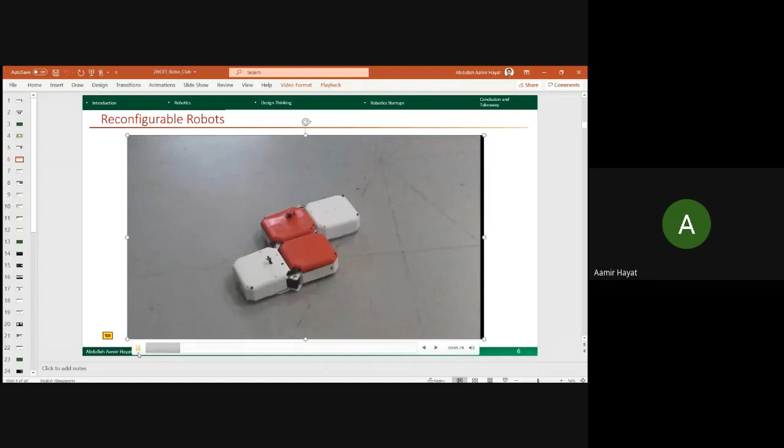So this robot is named H-Tetro. It's inspired from tiling - I hope most of you are familiar with the tiling toy we used to play with during our childhood, that can change its shape. This is inspired from that concept, and this robot is named H-Tetro, H for horizontal, and Tetro is basically from Tetris. It can change its shape into I, J, L, O, S, T, and Z configurations. At the same time, you can see the application of this.

This is a typical Roomba robot for floor cleaning, and they have sold million units worldwide. But this has a fixed morphology, and it cannot access these areas. So this is the experimental setup that we developed for proving the advantage of reconfigurability. There is a camera mounted on top, and this can access the narrow passages. This was the prototype we developed earlier, and now we are using it for a floor cleaning application. As you can see, this is the area coverage that we show. The advantage is, as it can change its shape, it can even do the fishbone trajectory to cover the area.

This is the team involved under Prof. Mohan, who is working on tiling robotics. This is a new branch of robotics that we are pitching to the community under the name of tiling, because mathematicians developed a lot of theorems and formulas for how to tile a given space so that the area coverage can be maximized. So the theory backup is taken from there, and we are adding to the aspects of research and development through this robot. This is one of the publications that I did.

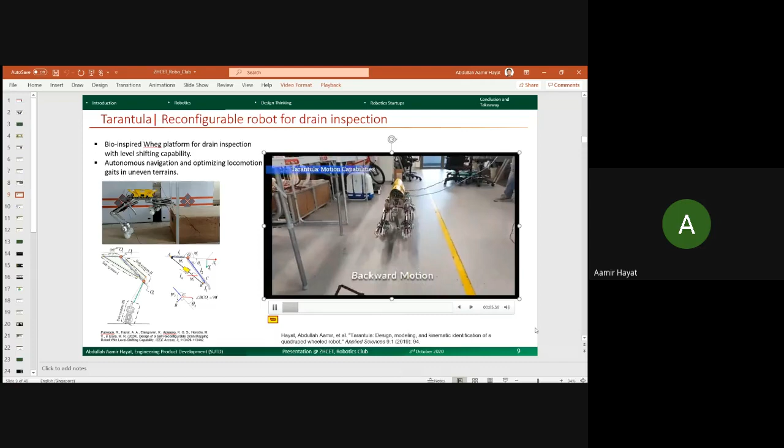I will play the video to give a feeling. This was my second project here, which I led a team on. We have very good design engineers, Dr. Karthik, his design intuition is very good, and we discussed through the starting phase of this, and we developed this test bed to test the level shifting capability of this.

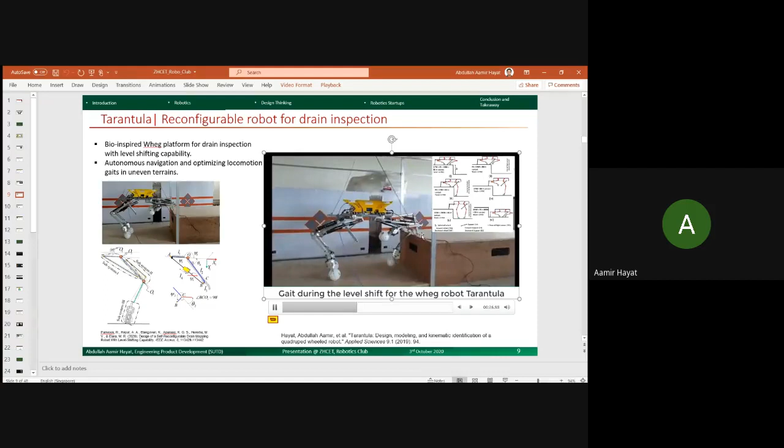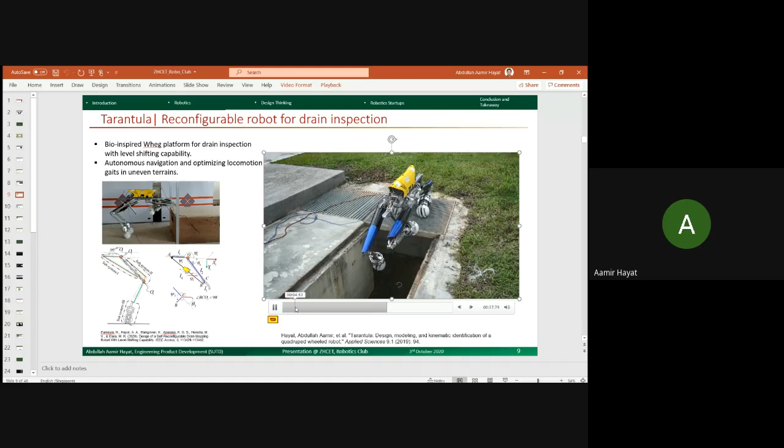And these are the gaits being taken by this drain inspection robot. These wheels are, again, a novel development from our lab. We also got a patent out of this, which I will show, what are the features of that wheel.

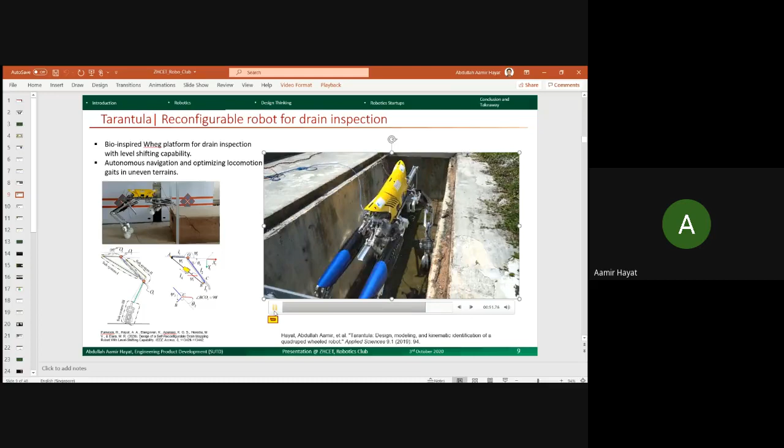So basically, in robotics, there is a portion of cake for everyone, be it mechanical, electrical, electronics, or architecture. Even before coming here, I thought, okay, what will architecture people do, but now they play a very important role because they are developing futuristic buildings which will have human-robot coexistence. So now they need to redefine the designing of a space, that is another field we do research on in our lab.

We have architecture graduates, like BArch, in our ZHCET. One fellow, his name is Matthew, he is pursuing his PhD in robotics. So I'm looking at the futuristic design of a building and interiors so that humans and bots can coexist easily, because whatever we have designed till now is human-centric, not robot-centric.

As I told you, the wheel is one of the novel developments from our lab, and it is labeled Ospheel, the acronym for omnidirectional spherical wheels. And omnidirectional, I hope, as the word itself suggests, is familiar to you, I hope all of you are familiar with omnidirectional and holonomic wheels.

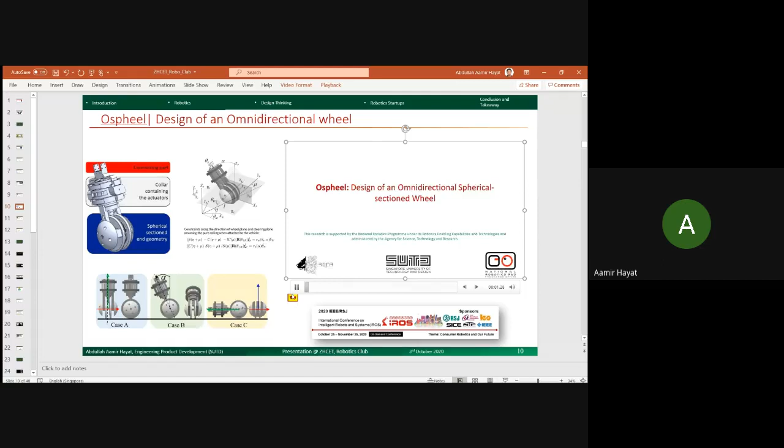So this is basically having two active rotations. Basically one like a simple wheel, and the other is orthogonal to it. One is like a wheel, like in a car or bicycle, that is one direction of rotation, and another is perpendicular to that. So just to ask, have you ever observed this kind of mechanism anywhere, in any of the movies or anywhere?

Any answer, in any movie have you observed this? Dark Knight. Yes, right.

So we got the inspiration from there, and then we spatially arranged this gear mechanism. The transmission is done in such a manner that it allows for two orthogonal rotations about it.

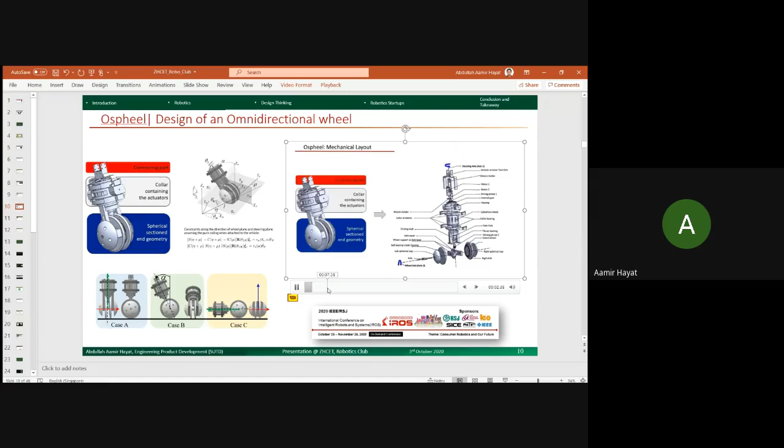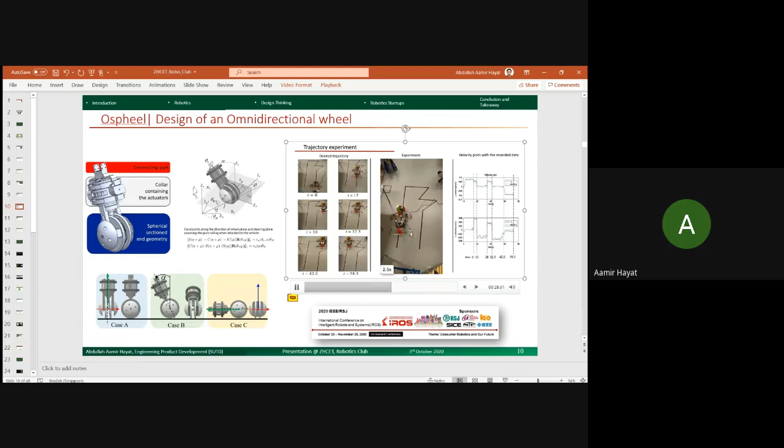Since this is modular, you can club it into four, as was visible in case of Tarantula. Now we tested its holonomic capability by mounting it using two of these wheels, and this is one of the nice videos that we took.

There are others, I think most of the robotics club people must be familiar with the Omni wheel and Mecanum wheel. We use it for holonomic locomotion, so that the bot can move from point A to point B without steering. It has the capability to move in any direction at any point of time.

So this is an add-on to that, because those wheels, specifically Omni wheels and Mecanum wheels, are meant for indoor environments. For outdoor use, there are passive rollers, and dust particles, hair, all those things get entangled inside the wheel, and that gets it jammed.

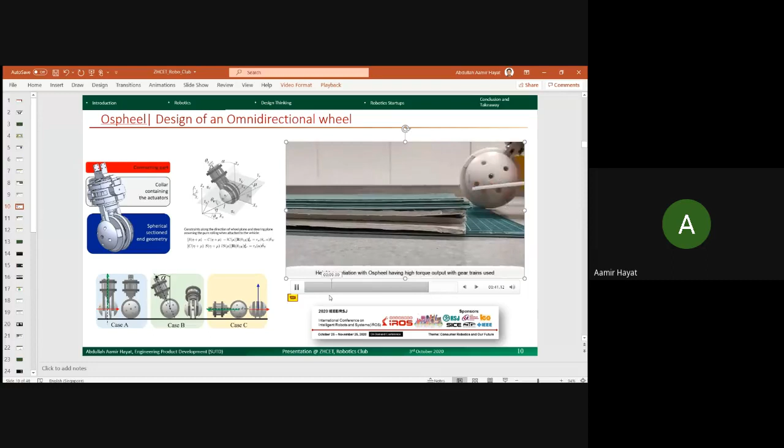So you can see the opening. So we have designed a cover for it, so it is completely sealed, so that the outer particles cannot get in. So this is one of the works.

The wheel is patented, and then we put our work into one of the esteemed conferences in robotics, that is IROS. It is this year, held in, I think, Las Vegas, USA, but due to this COVID situation travel is restricted, and they have even waived off the fees, because generally they charge a good amount. I think for the paper, after acceptance, the charge is around 1,200 USD or something.

So there is again one takeaway for all the participants here, that you all must join this conference, because this is for the first time the conference is free, and the whole robotics community will be there, ranging from people in mechanism, autonomy, control, biomechanics. So all sorts of exposure you will get there. There are very good professors who always visit these conferences, and the impact of this conference is very high.

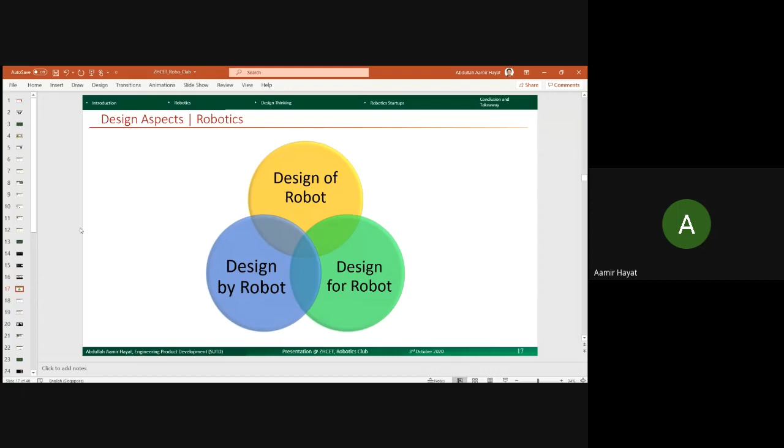So these are the three aspects we look at in our lab design. Apart from design of robot that everyone does, we also do design by robot and design for robot. As time is limited, I will just skip this, maybe some other time I will talk on this aspect.

Always keep in mind, whenever you are designing, always design a thing by considering it in the next larger context, like a chair in a room, in a house, in an environment, an environment in a city plan. So everything should be coherent. It should not look like an odd man out. If you keep anything disorganized in your room, it will be odd and won't serve its purpose. So always think in a larger context of what it is meant for.

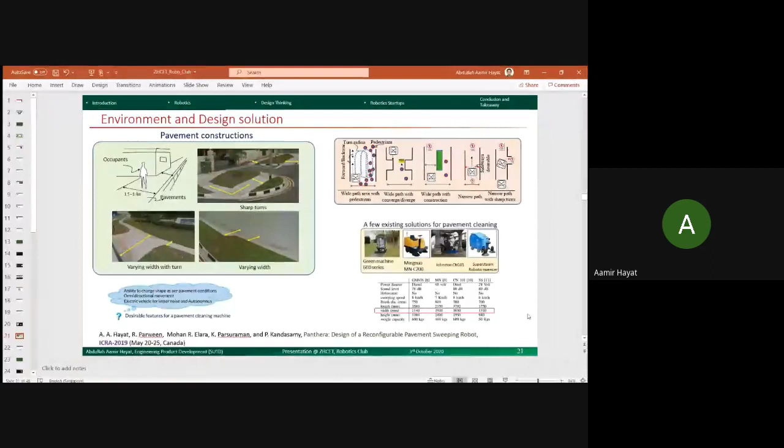So our objective was to come up with a design that fulfills this requirement of adjusting itself in a multiple width pavement scenario, and it should not obstruct pedestrian density, because in peak hours the number of pedestrians increases, and the machine also needs to give way to pedestrians, because pavements are made for pedestrians, not for machines. So this cleaning machine was developed from our lab, and it can reconfigure. This is the animation proof of concept.

One thing I observed is that even people involving architecture background are very good at software like Inventor and Maya, the animation software. So they help us in visualizing the concepts.

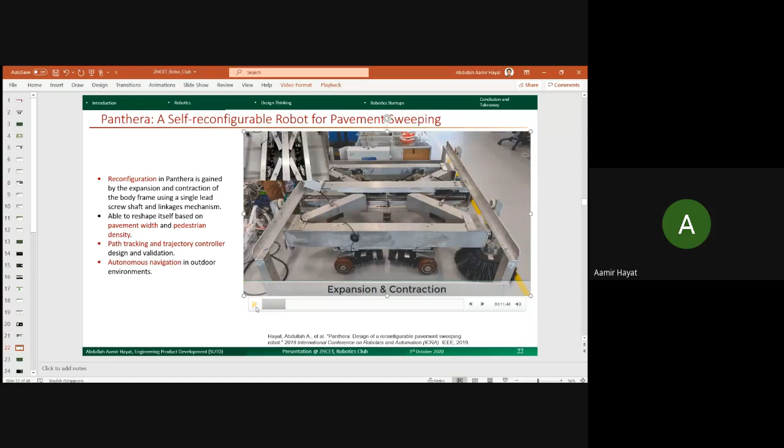This is the design, the mechanism used for changing its width so it can expand and contract. We've used a differential wheel at each location, with a total of 8 wheels and 8 motors for locomotion, and this pavement sweeping robot can reconfigure itself while moving. It can have multiple gaits for reconfiguration, as I'm trying to show here. The center can move in a straight line, and it can reconfigure.

So all these experiments were done, and then we moved ahead with autonomy using a Velodyne sensor that we have in our lab for 3D mapping and localization. There are a lot of repositories on GitHub for these localization approaches, which our team uses.

These are the vision-based reconfiguration approaches that we adopted, where if a camera detects a person, the robot needs to reconfigure itself to give way on the pavement to the pedestrian.

I'm just going fast now because I think I have less time. Let me check how much time I have. Right, one hour—I have 15 more minutes. Half an hour, I think you can cover this one. Yeah, okay.

Now, after this, I'll briefly talk about the robotics startup, since I think most of the Robot Club members also think of coming up with something that has substantial value in the market. But a robotic startup is unlike other startups, because at present I'm also extensively involved in this activity, which I'm going to share with you all.

What I observe is this quote from Phil Duffy, a design engineer at a company in the US. His quote is: if a startup is a marathon, a robotic startup is a decathlon.

A decathlon is an event where multiple areas of expertise are required—it's not like you just need to run. Similarly, to come up with a robotic startup, you need people from electrical, electronics, architecture, mechanical, civil—everyone. Everyone has their own contribution.

So we have now come up with an education robot named Yali Robotics, which targets transforming learning with transformation robots. Again, you'll appreciate how it developed—first for research purposes, then its application for cleaning, and now it's being transformed into an education robot.

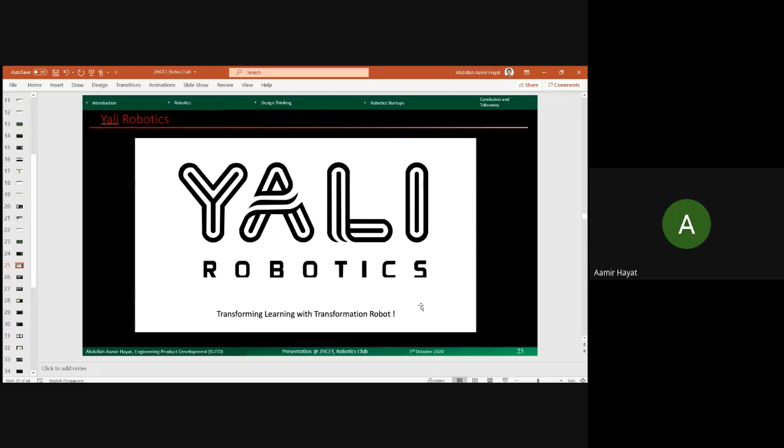It was conceptualized about a year back. We started working on it from around March 2020, and because of COVID things slowed down a bit, but we've finalized the design and are now looking for manufacturing partners in Taiwan, Malaysia, and maybe India as well, for manufacturing and assembly.

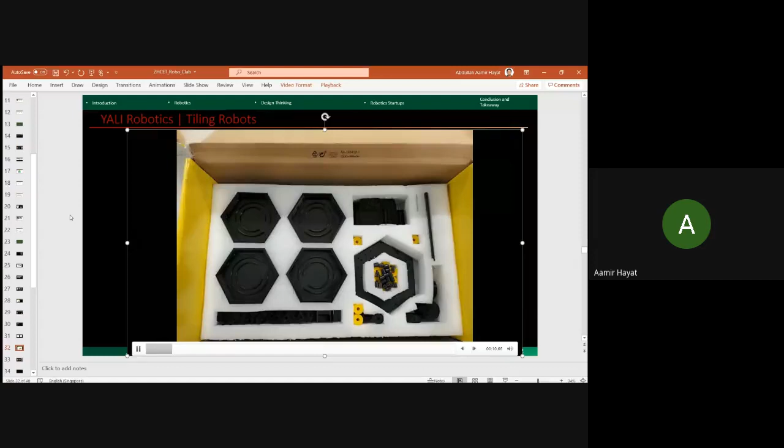So I have a short video to show you how the first version looks like. This is just a work of 3 months that students came up with, because we have the knowledge base already existing, but still you need to work. There is a PCB design part, 3D printed parts, even the packing is done in the lab. We have input from architecture people, and we have these interns and research assistants. Altogether a team of 5 people came up with this in a span of, I think, 3 months, but definitely the knowledge base was existing with us.

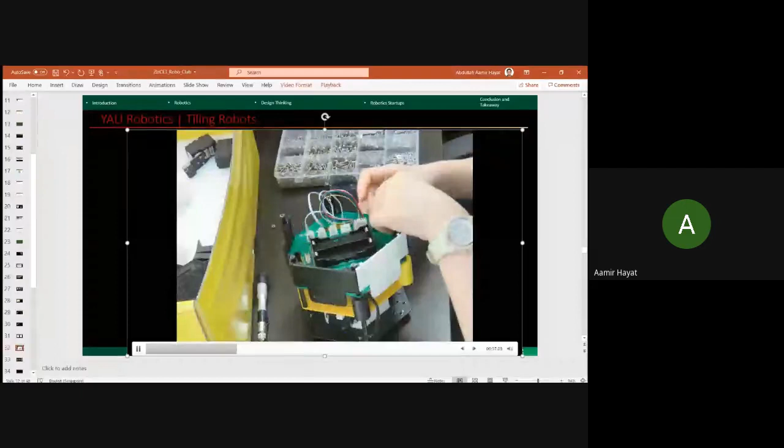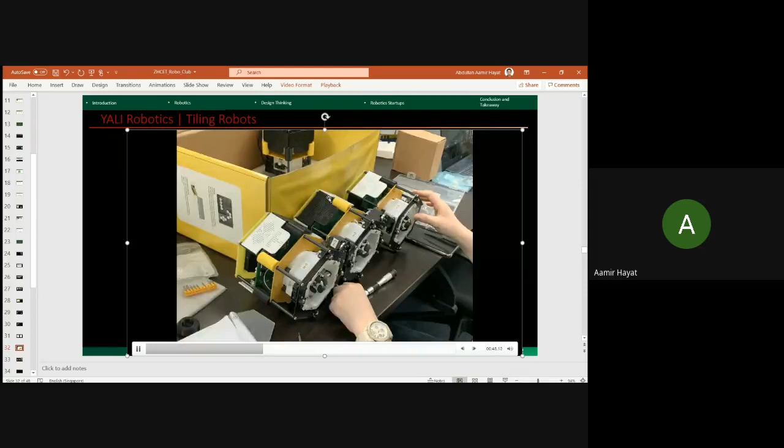So it can change its shape after assembly. You can integrate it with your mobile app. And the best thing that we are looking forward to provide the university with is the open source ROS based learning.

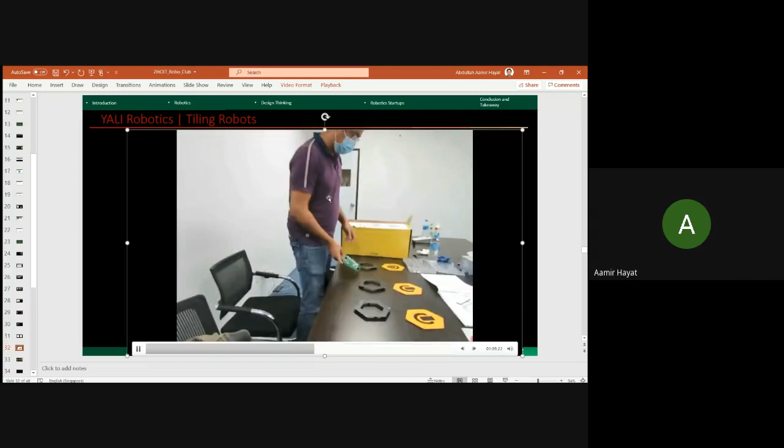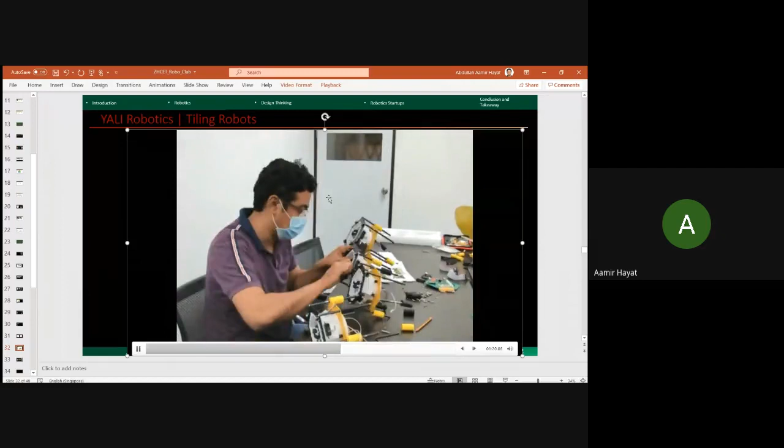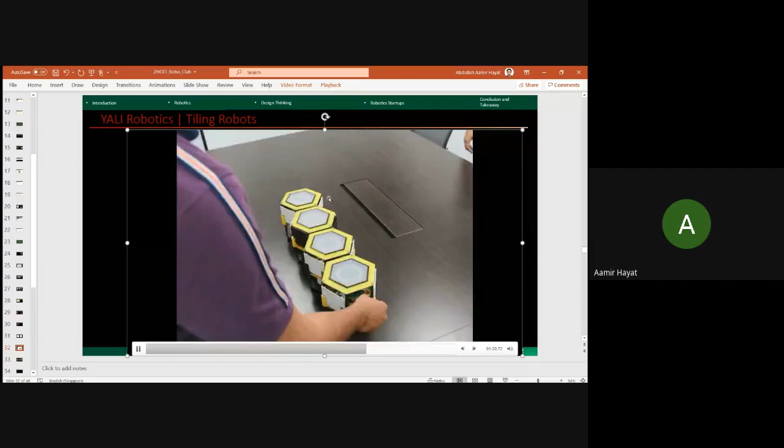We are also developing pedagogy tools for it, so there are well-defined projects for every branch. You can do kinematics, dynamics, even fluid mechanics. We have now thought of how to integrate that, so we can mount one container filled with liquid and observe its sloshing. With all this, we are targeting to come up with pedagogy support for this bot targeted at engineering colleges, in India and abroad.

Another advantage is that the Singapore government is helping us in coming up with a robotic competition that we are targeting for the year 2022, two years from now, so that it will be an international event where colleges will take part. We will first put a national level competition, and then from there it will be an international level competition. So there is a lot of support from the government in getting this done in the span of 2 years.

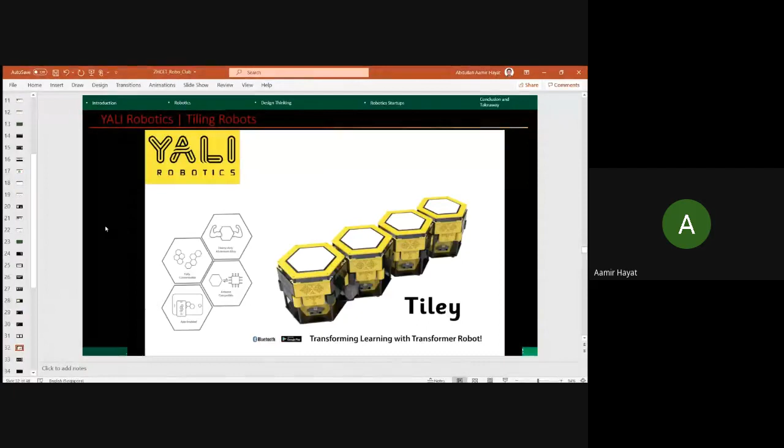And we now have another chain design coming up that will attach with this family of Yali robotics. So it is really a nice learning process here, like how the startup works, how there are n number of things that need to be taken care of. Maybe I will talk on these aspects of startups in detail some other time if we organize some talk.

Then we are looking at these competitions based again on the tiling concept, that tile game, and there is a start to finish where you need to take these shapes and finish the path planning. And then we have these mazes to solve based on changing the shape.

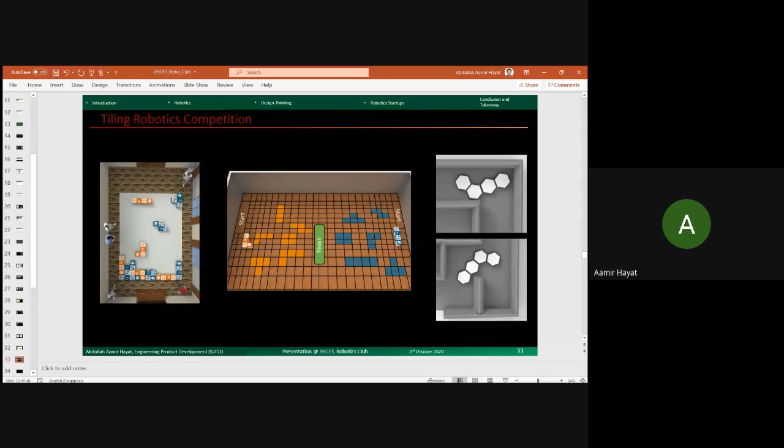So I will now conclude by saying, being associated with Robotics Club, you people can look for Robotics Decathlon, which is basically translating your idea into a startup. Because irrespective of any company, what I find is there is a lot of industry backup in Aligarh for lock manufacturing, so they must be needing some robotic solutions there. It's just a matter of you searching, going after them, talking to them, getting the problem statement, doing the projects, delivering the projects, letting it fail a number of times—doesn't matter—but finally at the end of the day you will have that learning curve that will be essential irrespective of which area you go into. I'm not saying everyone should go for robotics or everyone should go for PSUs; everyone has their own interest.

What this process lets the students learn is teamwork, imagination, and application of the knowledge we learn in classes from our teachers, because nowadays we have a lot of open source knowledge available that can be easily integrated. This gives the opportunity to students to learn teamwork.